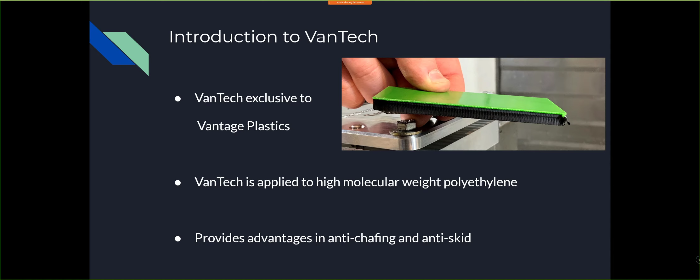The issue Vantage Plastics approached us with is this excess edge on the VanTech material. Pallets are removed from the thermoformer, and an employee currently uses a pneumatic hand router to go around the part, leaving an undesired burr on the finished material. This has proven to be both time consuming, and it requires the use of an open flame to heat the material, which they are trying to move away from.

We reconstructed the problem using the CNC mill to cut 4x4 test blanks of the material, varying the speed to observe how the VanTech burrs with the cutting edge and flutes to emphasize the issue we're dealing with.

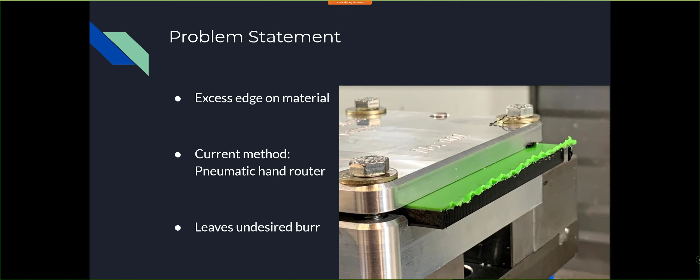All Michigan Occupational Safety and Health Administration and International Organization for Standardization standards need to be considered for both our customer and our group to follow. MIOSHA Standard 1126, which is General Industrial Safety and Health Standard, along with MIOSHA Standard 1128, which is hand and portable power tools, must be followed. These standards both ensure the health and safety in the workplace.

And then ISO 13399-1 states the fundamental principles for cutting tool data, representation, and exchange. This standard just covers any transferring of cutting tool data between us and Vantage Plastics.

Something we considered early on in this project was the use of a nibbler. A nibbler is going to utilize a punch and anvil, which gives us a localized shear force with a good control edge. An electric nibbler is going to oscillate at about 230 to 370 RPM, which chews through the material like a rodent.

They're considered very fast and versatile, especially when compared to similar tools like shears. They do result in vast chip formation, but given Vantage Plastics' current solution using the hand router, this difference is pretty negligible. However, because nibblers are typically used to cut 16 gauge sheet metal, large capacity nibblers come at a price tag. It requires the use of a high-end industrial nibbler coming in at about $3,000. For that reason, they weren't explored further.

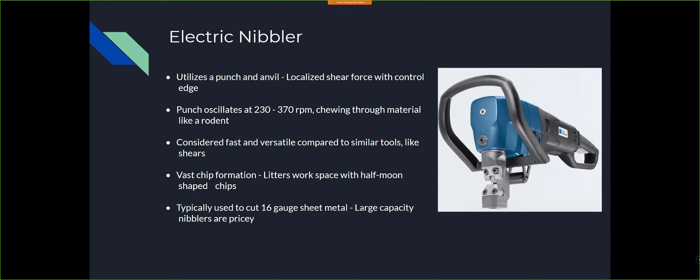While doing research into how the industry goes about cutting composite materials, ultrasonic cutters are a commonly used method. Depending on the application, they can be used anywhere from cutting your Thanksgiving turkey to gate cut resin molded products. It functions by oscillating a blade at a high frequency of about 20,000 hertz. The vibration is microscopic and is virtually invisible to the eye.

The ultrasonic cutter is extremely versatile in use, which can be used by hand, robotic arm, or CNC. The downside of using this method is that although industrial cutters will give the cleanest edge, they are extremely expensive, ranging from $15,000 to $20,000 for a single unit. Also, we are unsure what the wear of the cutting edge will be over time, leaving us with long-term cost concerns for the blades and maintenance for the machine.

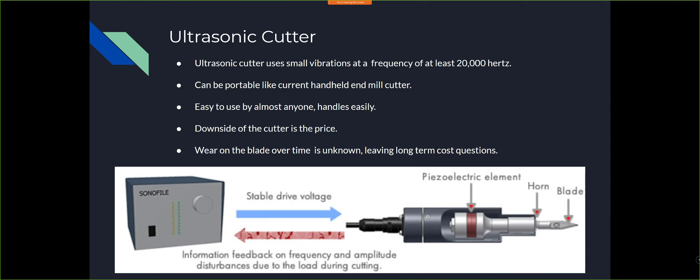The current technology being used to cut this material is a pneumatic-powered hand router. Currently, this tool is being used for the low cost and fast-running nature of the operation. The main issue with this method of cutting is that the VanTech material is leaving a large undesirable burr on the surface of the cut plastic.

VanTech is applied to a high molecular weight polyethylene base layer in the thermoforming process.

The main goal is to achieve and implement a design change that would be a seamless transition to what they already are currently doing. Currently, Vantage Plastics is using the LMT Onsrud 109467 straight cut O-flute style routing bit. Although this tool is very cost effective and American made, it fails to deliver the result that Vantage requires in the cutting of the material.

In our research, we found there's a limited number of companies that specialize in this specific style of tool. The main goal of using this technology is to provide the seamless transition and adaptation. The hand router itself works to expectations, running up to 20,000 RPMs, and is very easy for operators to use.

Researching and finding a cutter to deliver the results will ultimately be the most viable option for the company. When the best cutter for the job has been selected, longevity and tool life will be of the highest priority to keep the solution cost effective in the future.

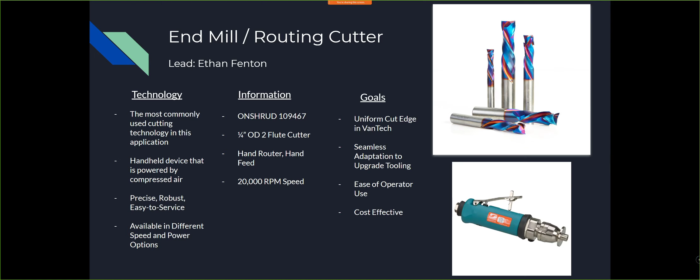Due to the unfortunate circumstances of the COVID-19 pandemic, our spring semester and subsequently our capstone project was interrupted. Since testing was not possible with the school shutting down, we have decided to give recommendations of how to move forward. It is important to note that the MIOSHA and ISO standards for processes, safety, and data representation are diligently followed in documenting all further steps.

By utilizing the Taguchi method, the dependent and independent variables can be identified and rated. Then, calculate the cutting force between an end mill and the workpiece, identify the formulas for rotary cutting and machining, and analyze the data produced.

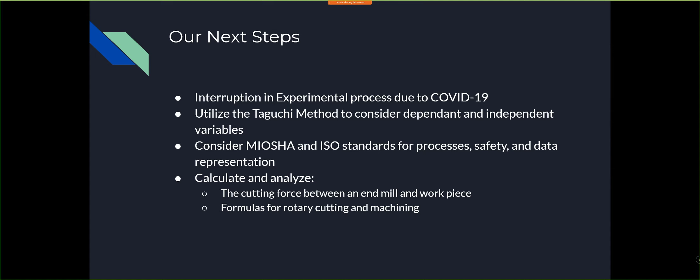In our experimental process, due to the pandemic we weren't able to actually perform the experiment ourselves, so we are going to give recommendations on how to select an end mill and router bit for this unique cutting situation.

Since this material, VanTech, is very unique and new on the market, there isn't any set companies that make a router bit for it. So we've had to look and research router bits that work in similar types of plastic.

We've determined these rules of thumb to help in experimenting and finding what cutter will work the best. You should always consult the machine operator's manual for the capacities and recommended feed rates. We used 100 inches a minute because it best represented an operator moving through the material manually. We should also start with shallow cuts and calculate chip loads, speeds, and feeds with the given formulas.

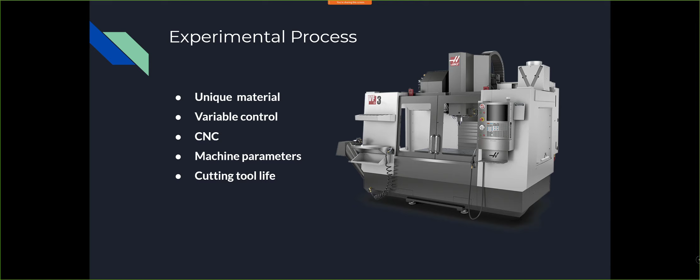We applied the Taguchi method to guide our experimental process. With multiple variables such as the temperature of the material, the end mill RPM, and feed rate, it can be hard to gather enough data to properly optimize these variables. The Taguchi method utilizes an orthogonal array to set up multiple testing levels for the variables and what levels to test at during experiments. The effectiveness of variable changes can be explained using the signal-to-noise ratio.

The signal-to-noise ratio is an important factor because this will help identify key variables and prioritize them. When the variables are identified, the uncontrollable variables are minimized or even eliminated. This will help greatly improve the cutting solution.

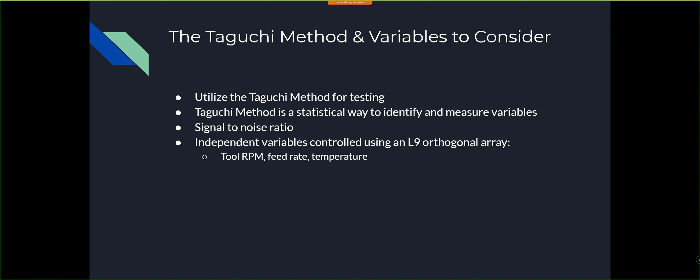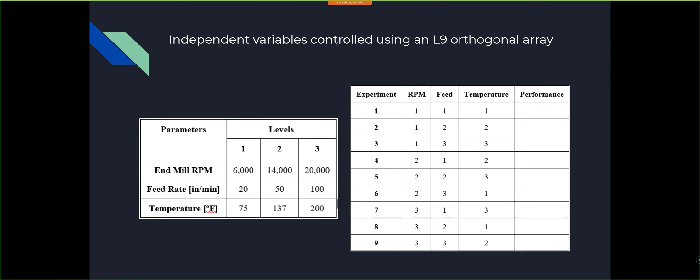Unfortunately, due to our current situation, we were unable to physically test our solution, but adapting to the changes, we were successful in changing our report into a consultation. We are confident that our consultation will best set up future engineering groups to successfully find a solution for cutting. Thank you.